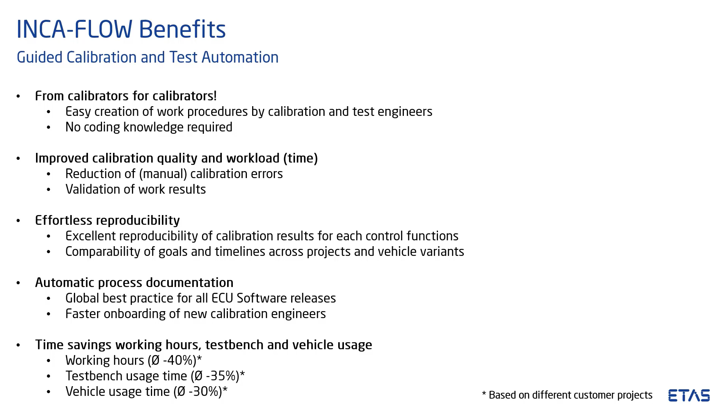In fact, vehicle and test bench usage is lowered due to the possibility of planning the calibration task entirely in the office, so-called offline. Going into the details of these time savings, we can see here three diagrams based on 100 hours of engineering work with and without IncaFlow.

On average, based on different customer projects, a saving of 40 hours, which corresponds to 40% on calibration activities, 35 on test bench usage, and 30 on tests in the vehicles is reached. Generally, compared to manual calibration, IncaFlow can boost their efficiency even up to 80%.

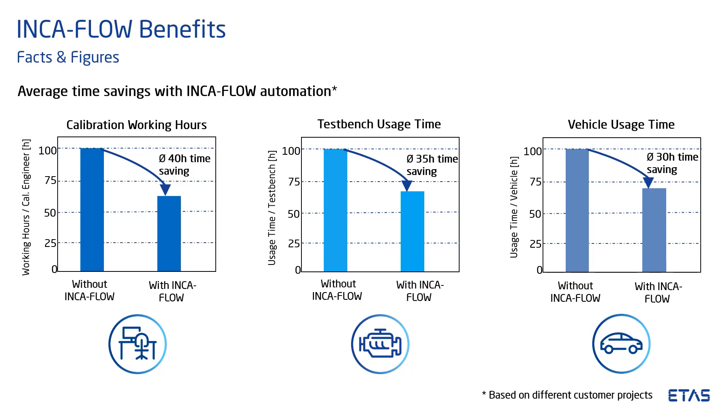Nevertheless, the total project time is typically shorter. With variants, it is a very efficient approach. The effort is taken in for the first project, but it pays off for the next ones. In fact, giving 100 to the function calibration working hours for one vehicle, IncaFlow reduces the whole amount of hours from 350% down to 120% with 5 vehicle variants.

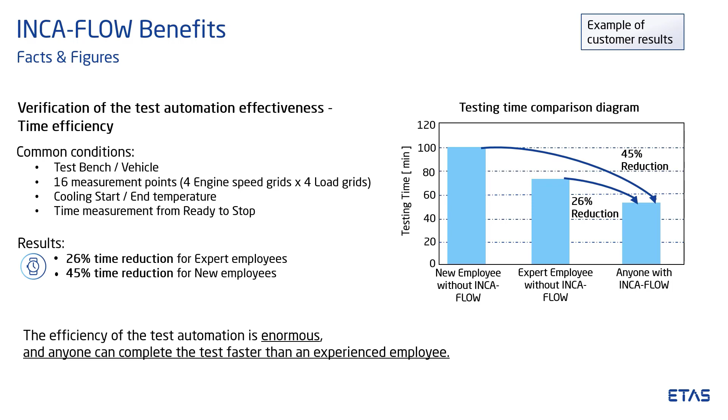Regarding time efficiency, there is a popular success story by our customer Subaru, which is also available in the full version on the ETAS website. They demonstrated that a new employee working with IncaFlow reduces the calibration effort by 49% in comparison to an expert calibration engineer. That's an incredible result.

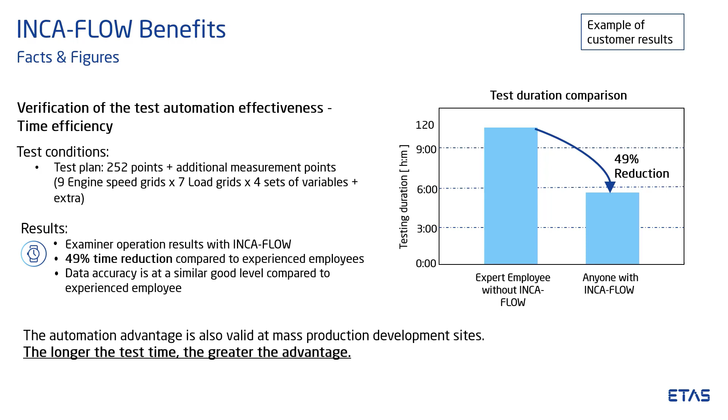Concerning test vehicles usage savings, Bosch and ETAS in Brazil have presented at the SIMEA 2021 the project Automated in-vehicle engine calibration to optimize emissions levels using machine learning.

In this context, IncaFlow has been used for the automation of DoE execution and data extraction, together with ETAS ASCMO, used for the design of experiment planning and model analysis, along with ETAS INCA for data measurement and calibration.

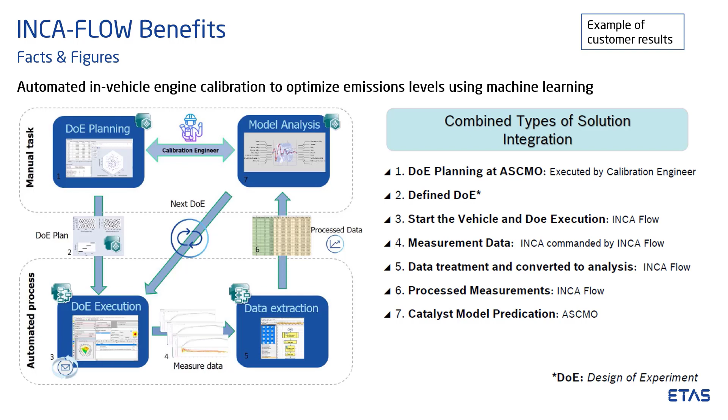With the manual approach, the facility usage was 7 weeks, and the engineering work hours were 16. With the ETAS toolchain, the facility was needed only for 2 weeks, and the engineering work has been lowered down to 1.5 hours. This means that there is a very high task effort reduction, 71%. The full published article with all details of the project is available on the ETAS website.

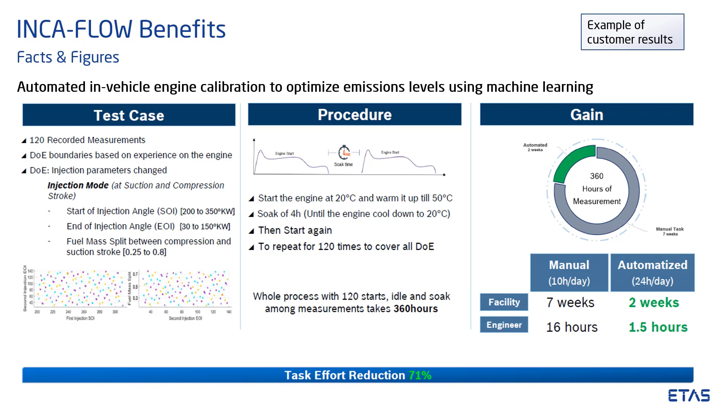IncaFlow differs from traditional approaches to automation. In fact, it provides a high degree of freedom to react to circumstances, which are very common in the test vehicle as well as the test bench. The guided calibration feature helps the user with the measure and calibration process standardization.

The approved and tested sequences can be compiled and distributed to the other users. It offers additional toolboxes with built-in methods for optimization, data analysis, model in the loop, test benches, and observability tasks.

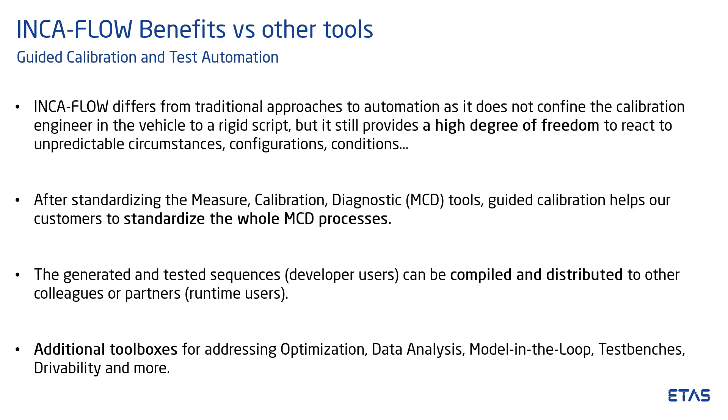As calibrator engineer, easily automate repetitive tasks. Effortlessly reproduce measurements with identical conditions. As a manager of a calibration department, deploy the best practice in your team. Increase efficiency. As an executive manager, ensure quality, well-documented procedures, and results.